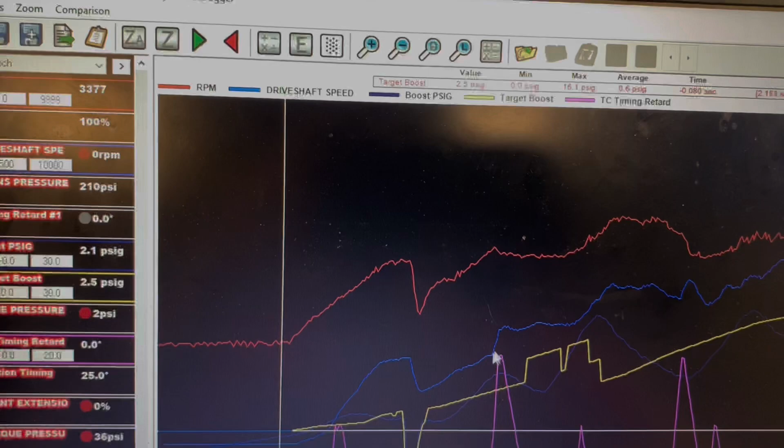I actually tried to get on my negative scramble - I hit the scramble by accident, then got on the negative scramble. And the negative scramble actually even that had too much wheel speed. You can see the traction control still trying to pull timing out of it to get the wheel speed into shape.

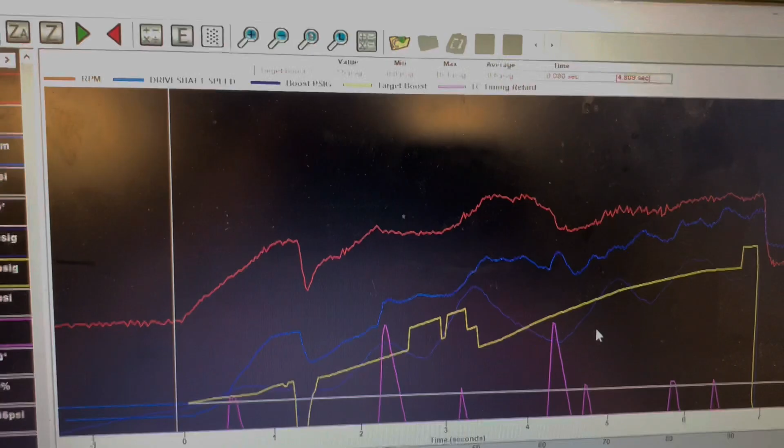So we only got the 2 passes. The rain moved in, and it rained pretty hard for a while, and I don't know if they could have dried it. I'm not sure. I don't think they were going to make any attempt to dry it. Didn't learn a whole bunch. I got 2 passes in. I guess the only thing I did learn is that something's still way out of whack on this thing. I think I got a few issues.

Maybe the main part of my issue is my tires. They're probably worn out. I added up all the runs I got on them this morning. I got 26 runs on these tires. I've never run them out this far. And I actually would have replaced them at the beginning of the year, but I just didn't have the budget for it. And then even this week I bought a drum of fuel and stuff. So I got the fuel now. So hopefully in the next couple weeks I can get some tires on this thing.

But I think maybe my tune is still too aggressive. I never took any boost out of the car with these new changes. So 400 pounds lighter, maybe it needs a little less boost to keep the wheel speed in check. The front suspension looks a little weird to me. Doesn't look like it has a lot of extension for some reason, but it actually has a fair bit.

I'm going to jack it up sometime today or this week and look everything over, just make sure everything's looking good, not binding or anything. And I want to see how much travel it actually does have. I might just kind of look into the spring rates and stuff. I never changed anything with all the weight I took off the front, so maybe the front springs are a little too stiff for it now. I'm not really sure. But yeah, I'm definitely fighting a few issues right now.

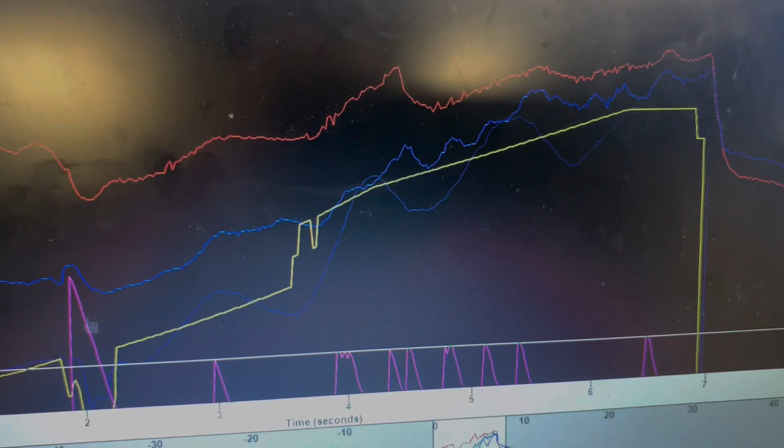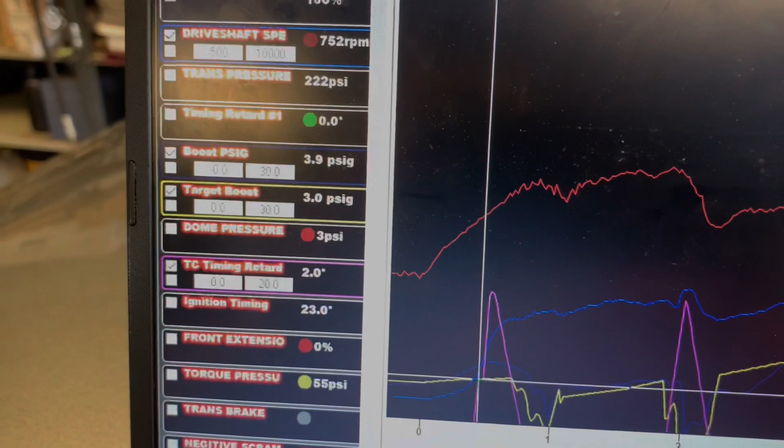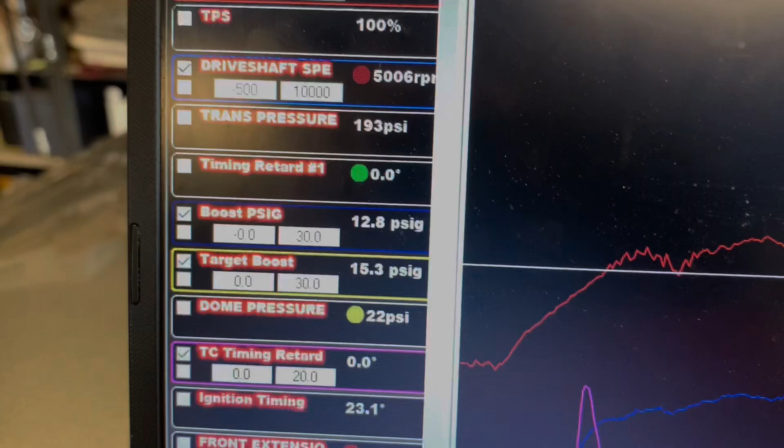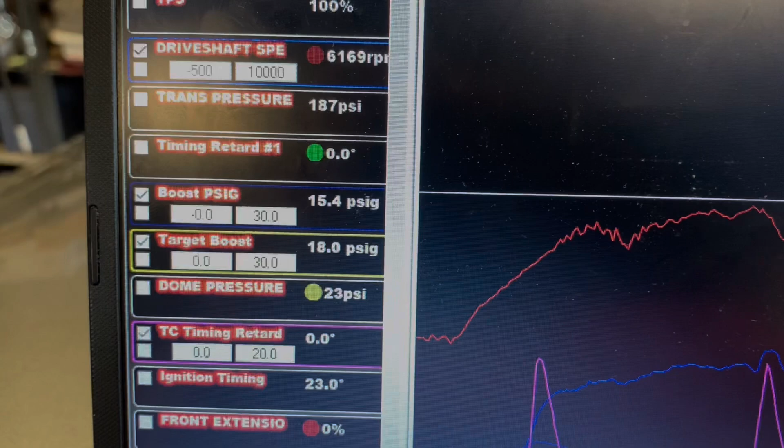I'll just show you guys what I'm talking about. The yellow line again is target boost. This blue line is my actual boost. So you can see right there, it's almost 3 pounds off under my target. And then right here, it's 2 pounds over. And then it's back to like 2.5 pounds under. And I'm sure that's not helping the situation, but it really seemed bad right now.

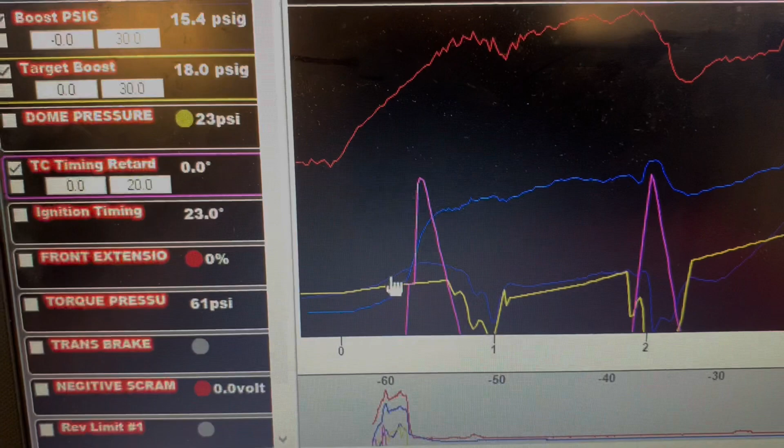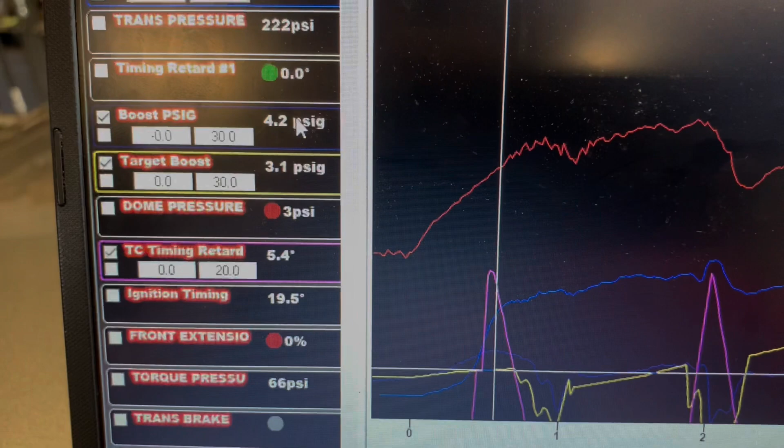And you can see down here, this is where I was talking about it overshot and stuff. So at this point here, it overshot by 1 pound of boost. Doesn't sound like much, but this combination seems to be really sensitive to boost down there. So definitely got some work to do.

There was a comment on the last video. Someone, I believe his name was Jason, said that basically I should try leaving with more boost and then using timing to control the wheel speed. I've been talking about doing that for like a year. I just haven't done it. That is something I want to try. I want to try and leave with like 4 or 5 pounds of boost and then knock a bunch of timing out to try and keep the wheel speed in check.

And I think it would work really good. It would get the turbo already spooled up, get some momentum going there, and the timing reacts super fast. So it's a really good way to take power out of the car. So that's something I really want to try, and that's probably something we're going to do. So I do appreciate the comment. I'm really trying to learn this stuff.